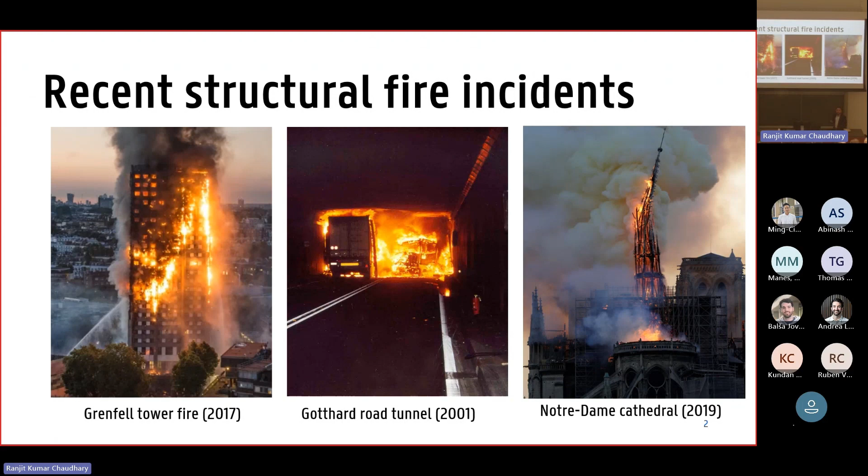Because these three structures represent different aspects of the consequences of fire damage to structures. The first one shows the damage to life and property. The second one shows the indirect damage caused - if the tunnel remained closed for 2 months, you can imagine how big an impact it would have on companies, offices, and several other works nearby, so the indirect cost was huge. The third one represents the damage to cultural heritage. The structure's history dates back almost 800 years, and it damaged something built very long ago, so you can realize the value of the structure.

So as explained about the three structures and their damage consequences, the consequences of fire on structures can be grouped into 5 consequences. Based on world fire data, roughly 1% of the GDP of most developed countries is spent on the cost of fire - the cost for fire protection and the cost for this type of damage due to structures. Realizing we have huge consequences of fire on structures, and a huge amount of funds going to fire protection, our structures should be designed adequately for fire, considering the economic point of view as well.

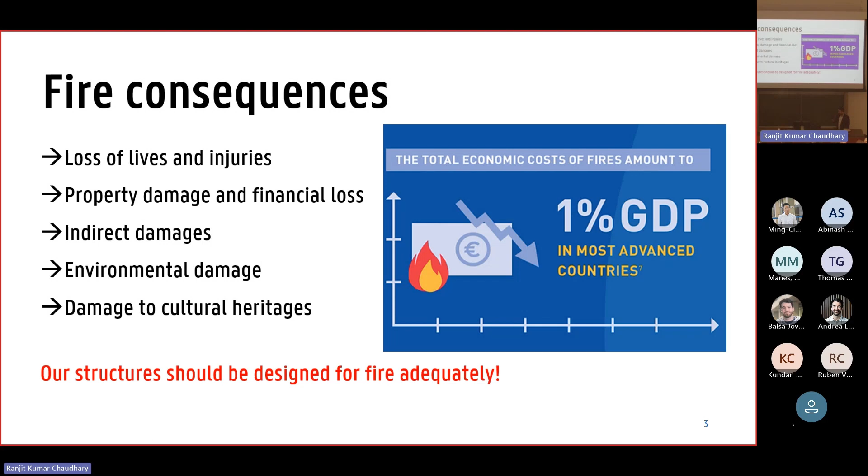So how do we design our structure for fire? Normally we consider a prescriptive approach. Prescriptive approach means we have design standards and design guidances such as Eurocodes, and these design guidances provide requirements for fire design. For example, let's take a reinforced concrete slab designed based on Eurocode 2. To design this slab, which has a thickness of hs and an axis distance of a, we get the values of these parameters from the Eurocode.

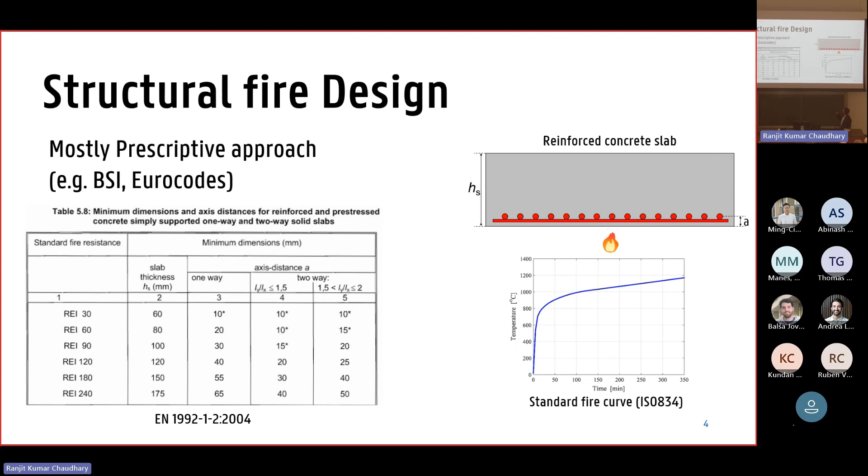We have standard fire resistances for different durations of fire exposure, and correspondingly for one-way slabs or two-way slabs, we have these axis distances. So we just go into the Eurocode, look at the data, and design our structure. This is the standard fire curve, shown here in the graph.

In these situations, we assume that our design is safe and adequate enough. Why so? Because these tabulated data are based on the historical performance of structures, based on failures in the past, based on experimental tests, and based on numerical investigations. So in this case, we assume our design is safe.

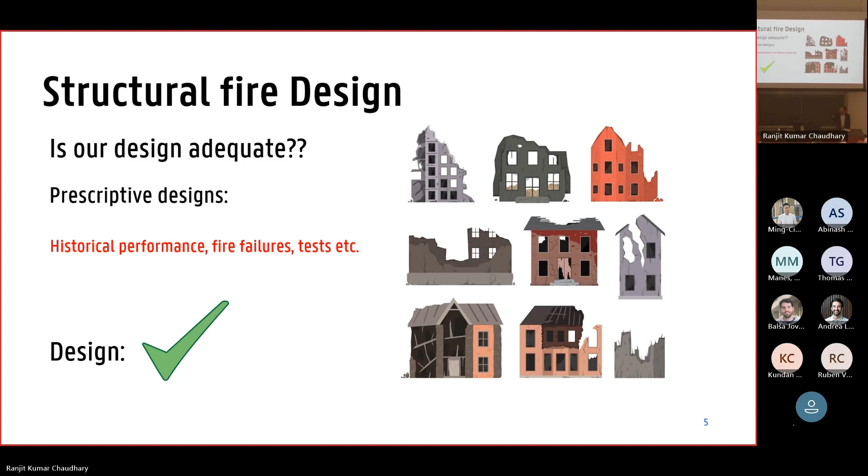But what about design for special design situations? By special design situations, I mean when we don't use the standard fire curve, which has only a heating phase - now if we have a natural fire curve, which has a heating phase and cooling phase as well, or we have special types of materials, for example wooden or timber, or we move to other advanced or high strength materials. For those situations, developing prescriptive designs or design requirements is very difficult because we need huge resources and huge time to develop these design requirements. So for this type of design situation, we adopt a performance-based approach.

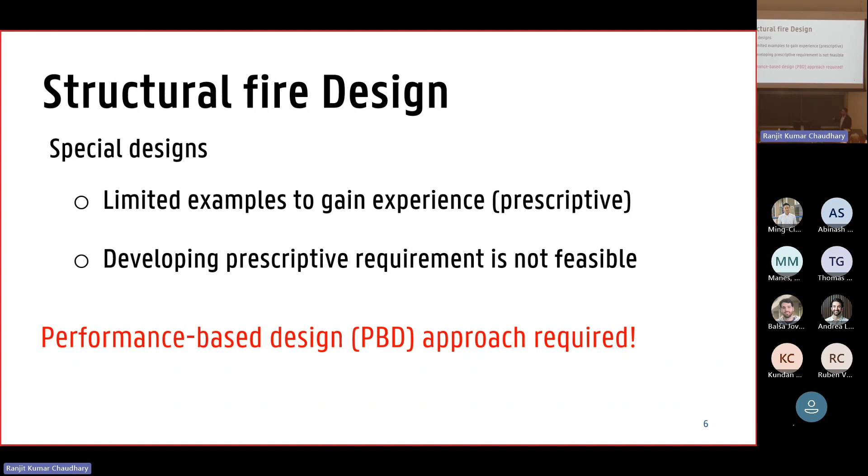And what is a performance-based approach then? In performance-based design, we are free to choose our design alternatives, our design materials, our design approach, and then we are also allowed to choose our own design objectives. But then the societal design objectives should always meet them.

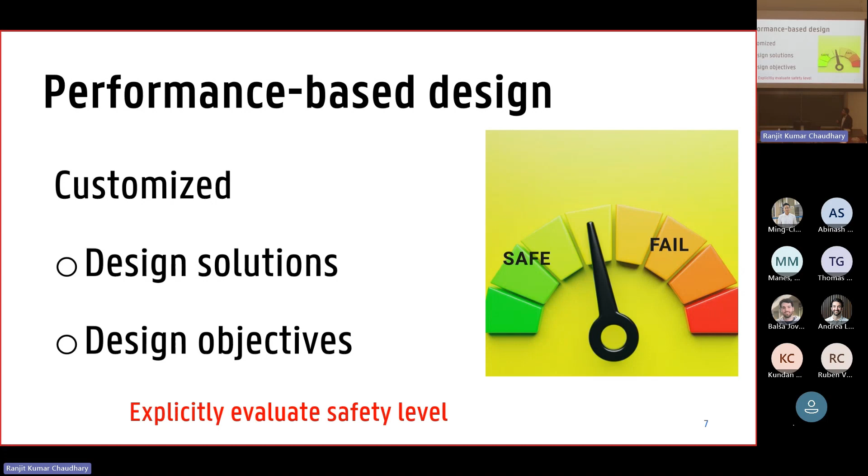Basically, we need to demonstrate in the performance-based design itself that our design is safe enough. How do we do that? We can do that by explicitly evaluating the safety level. So how do we demonstrate that our design is safe in the performance-based design approach? One of the approaches is through probabilistic risk assessment. We can plot the risk profile of the structure and check whether our design is safe or not.

So for a basic introduction to risk, for fire exposure of the structure, let's say there is a structure, and then there is a fire on the structure, and the likelihood of occurrence of fire is lambda. And due to the fire, there is a consequence of the structure, which is, for example, D. Then risk is defined as a function of the product of this likelihood of fire and the consequences of the fire. So now we know what risk is.

But what we can do is we can also plot this risk profile in a graph. For example, here the plot is shown for a general frequency-consequence diagram. So what we can do is plot the consequence severity on the horizontal axis, and plot the frequency of occurrence of these consequences, and we can plot the risk profile on this graph. If our design lies below this tolerability limit, our design is acceptable. And if it is above this tolerability limit, it is unacceptable.

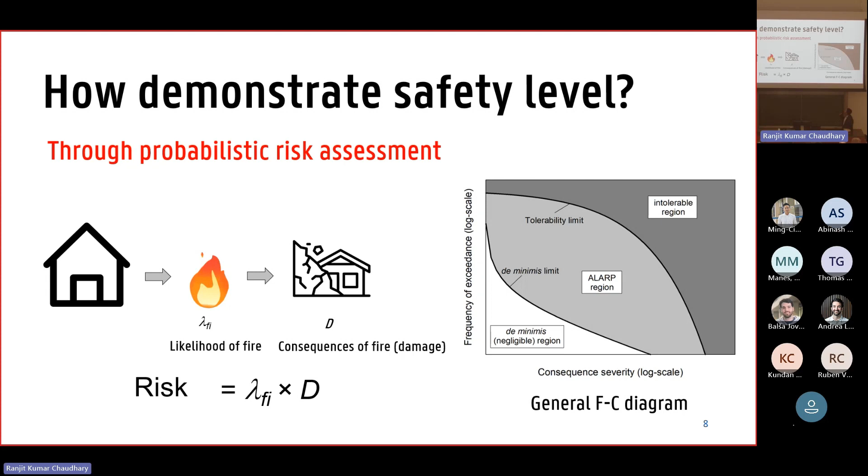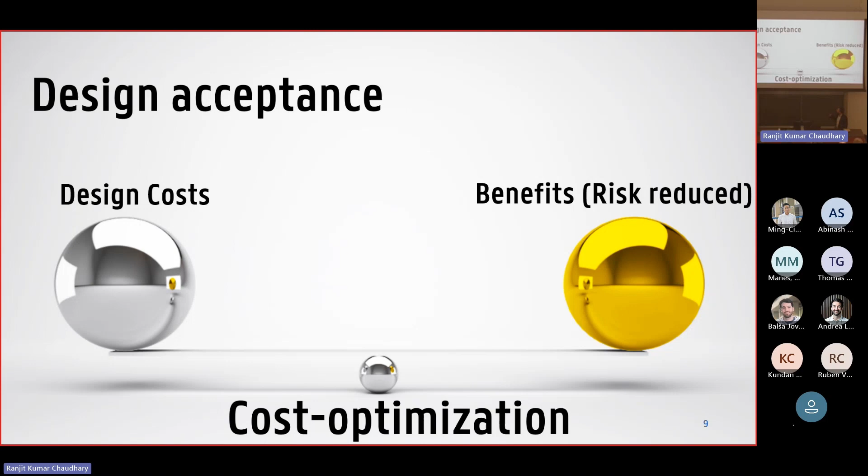So basically, we ensure our design is either in the ALARP region or de minimis region. But how do we ensure that our design is there, like in the ALARP region, or is sufficient enough? One of the approaches is through cost optimization. What we can do is we have the investment cost associated with our design alternative, and corresponding to that investment cost, we have risk reduction or risk associated with that structure. We can explicitly balance these two, and then our design is safe enough, we can say.

So now you understand the meaning of the topic of my dissertation, which is risk-based optimization of design in the case of structural fire design. I defined risk, I defined optimization of design, and then I defined what structural fire design is.

My dissertation can be divided into two parts. The first part is methodology and tools. In this part, I develop the methodology for risk-based design frameworks, and then the tools which support those risk-based design frameworks. In the second part, I implement those risk-based design frameworks using case studies.

So coming to the first part, I have 3 chapters. The first one is the risk-based design optimization framework, and chapters 3 and 4 support and basically provide the tools for the risk-based design optimizations. So coming to chapter 2, which is the framework for risk-based design optimization.

First of all, I would like to discuss the first framework, which is the lifetime cost optimization. So I would again discuss the same example for risk, where I defined the definition of risk.

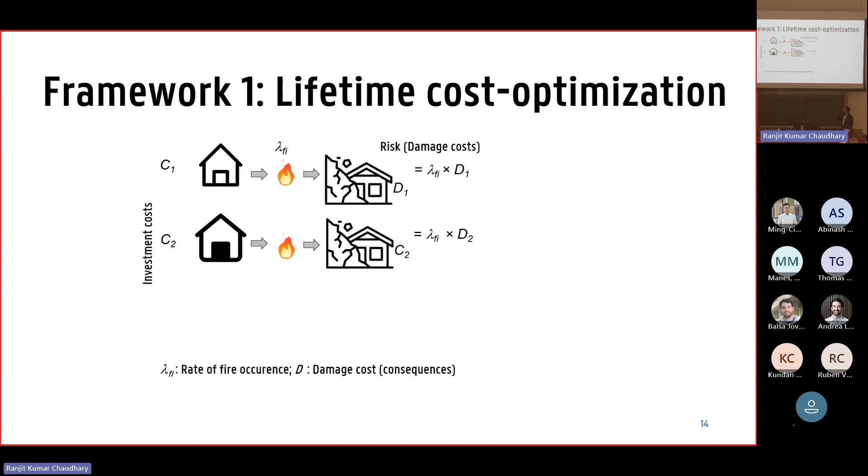First of all, let's say we have a structure, and for that there is a particular design solution or alternative, and the cost associated with it is C1. And the corresponding risk, or we can say damage cost associated with the structure, is this one. Then we have another design alternative, C2, and similarly we have another design cost and damage cost, and for the i-th cost we get the i-th consequence or the damage cost.

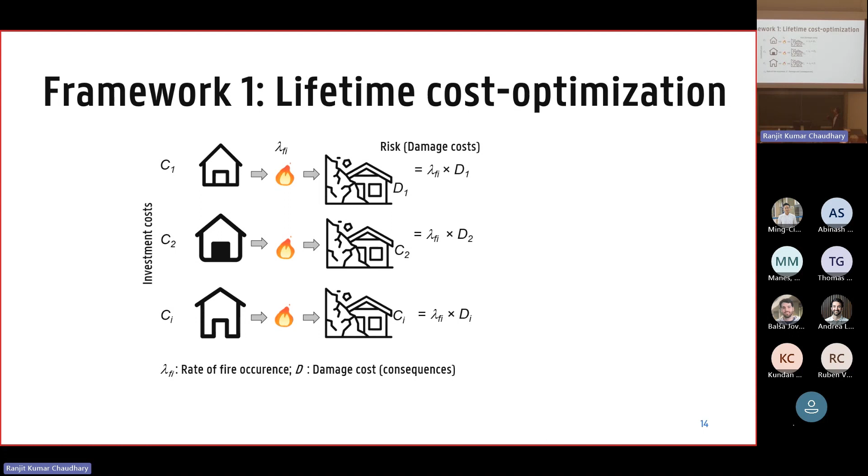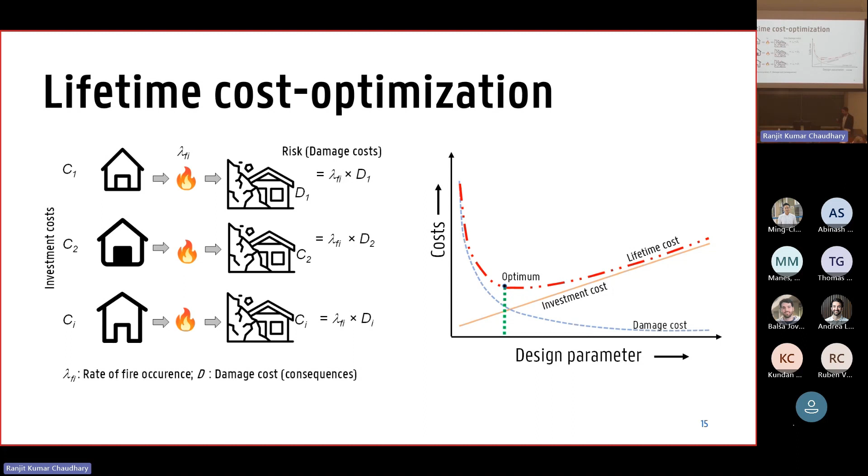And so if we plot the total cost, which is the lifetime cost, we have an optimum point, and that's how we do lifetime cost optimization here. To generalize more, because this was for the discrete case, we can formulate it as a

lifetime cost, which is the sum of the investment cost and the damage cost. This investment cost is the same as I said, but it also includes the obsolescence value, which is the cost of degradation for the investment year on year. And since it is a future value, I used a discounting factor to get the present value of those obsolescence costs. Similarly, the failure cost of the structure—since we are at the design stage, the failure cost associated is a future cost, and we convert it into present value also with the discounting factor. So this is how we do lifetime cost optimization.

I will discuss more of this using a case example in later chapters.

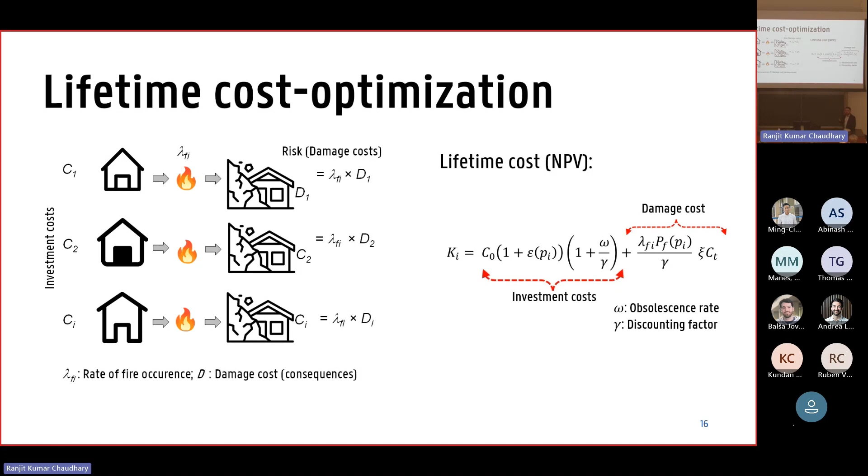And now we have this again. Let's focus on this equation for the lifetime cost. We have the first objective, let's say investment cost, which needs to be minimized for a design, and then we have this failure cost, which also needs to be minimized. So we have two design objectives here, and we added these two design objectives. But what if we have multiple design objectives and we cannot add up those design objectives?

For example, for the environmental cost, it is normally measured in CO2 emissions, and it does not immediately have an economical or monetary value. So we cannot add it up, and the optimization becomes difficult.

So for those situations, what we can do is apply a multi-objective optimization approach.

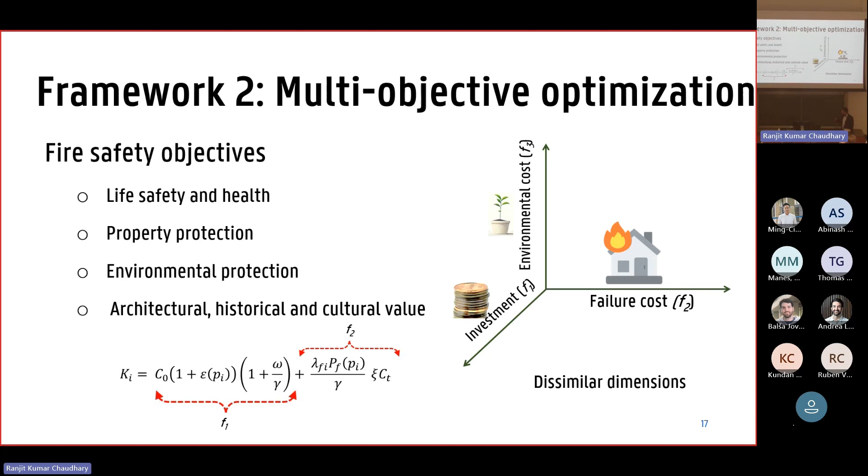And here is a general framework for multi-objective optimization. Based on this framework, what we first do is formulate a multi-objective optimization problem. We define design objectives, we define design constraints, and we define design variables. All of these can be multiple.

And then using an optimizer, for example here it is a genetic algorithm, we get multiple trade-off solutions. These multiple trade-off solutions are also called Pareto optimal solutions, and they present an optimal surface for the entire design objective. Once we have these multiple trade-off solutions, which are the optimal solutions for the entire design space, based on higher level information we can get one best solution.

So what I mean by higher level information is, for example, if we have environmental cost and CO2 emission which we evaluate, we can assign CO2 emission a monetary value, which can be a variable. Then for any combination of that CO2 emission conversion factor, we can immediately evaluate the best solution. So this approach becomes very efficient in that way.

And also we are free to choose any number of objectives, because in lifetime cost optimization, if we add different objectives we have to perform a grid analysis, and it quickly becomes challenging and difficult. So that's how multi-objective optimization is quite significant.

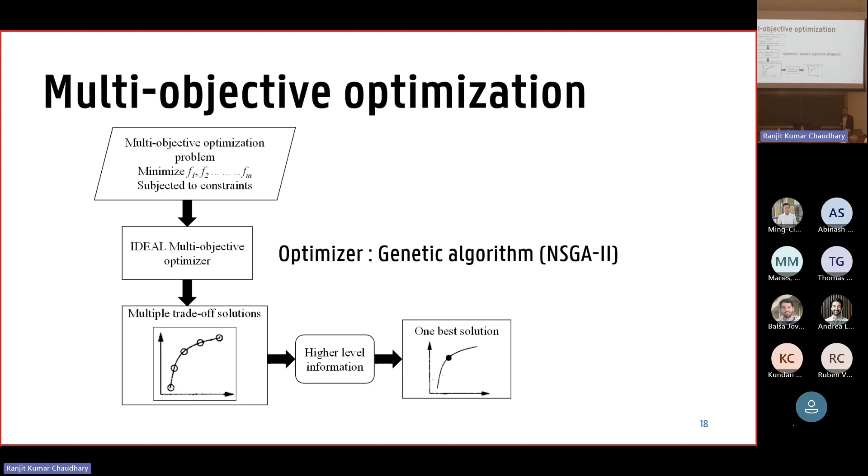And the third framework here—it's not basically a framework, but I presented it here as a framework just to keep it a bit separate. It's the generalization of the results of cost optimization.

The lifetime cost optimization and multi-objective optimization involve a lot of tasks, like evaluating the investment cost, evaluating the failure probabilities, evaluating the consequences. So it's quite a laborious task, and carrying out this optimization for all of the projects we have becomes very challenging.

So what we can do is propose a common target, and based on that target we can design our structure. That's how we can avoid the entire cost optimization approach by just looking at that target. This is already followed for normal design conditions, not for fire—for example, in JCSS and ISO standards, where they propose these target reliabilities for the design.

So what target reliabilities means: from our cost optimization, we get an optimum value of the design parameter, and for that optimum value of the design parameter, we can evaluate a corresponding probability of failure, which we can call the optimum failure probability.

And then there is a corresponding target reliability, optimum reliability, which we can select as target reliability. So for common design situations, like if we need to establish a common design standard, we can adopt this approach and propose these target reliabilities for that.

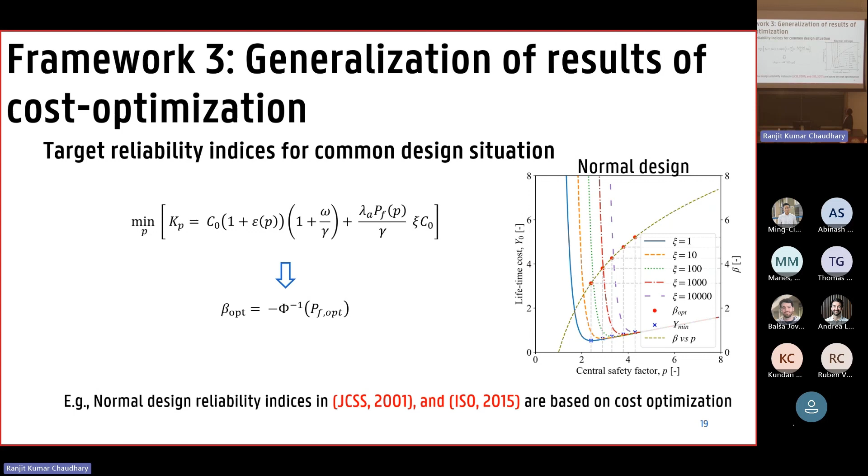In order to validate the approach, I carried out this lifetime cost optimization. For normal design condition, I plotted the different lifetime costs here in function of the central safety factor for normal design condition, and then I got the optimum value of the design parameters, and corresponding to this, I got the target reliabilities.

This is just to check if our approach is in line with the current state of art. We compared the obtained target reliabilities with the standard, that is JCSS, and we can see that the target reliabilities match well with what is in the existing standard.

But for fire design, we don't have these target reliabilities defined yet. So basically, our design standards do not provide anything such as target reliabilities for fire. So one of the tasks for my PhD is also evaluating these target reliabilities for fire design based on this cost optimization approach.

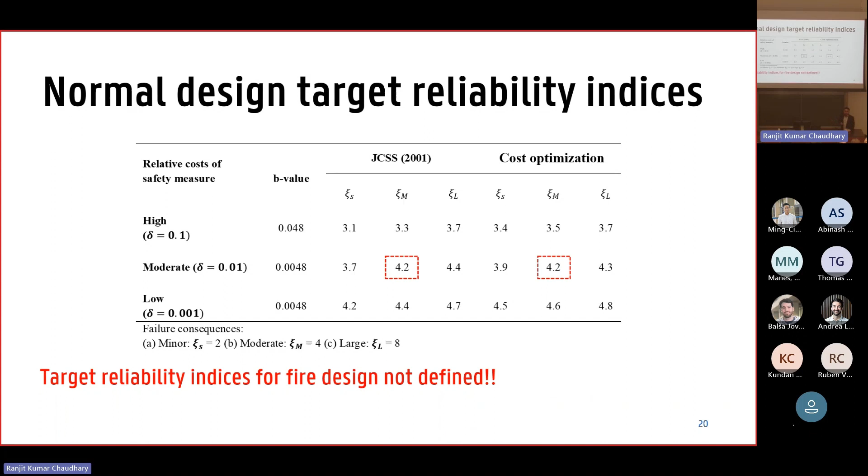Now I'm going to discuss the tools which have been used in my dissertation to support this cost optimization. The first tool is surrogate model-based structural fire design optimization.

So let's see again the lifetime cost optimization equation. We have this lifetime cost. For the evaluation of damage cost, which is risk-based, we have to evaluate the failure probability. And this is also a function of the design parameter and also the fire scenarios. So evaluating this failure probability is quite computationally expensive.

If you see this flow chart here, for the failure probability evaluation, we need to run our structural fire analysis 10 to the power 4 times. And structural fire analysis is itself a computationally expensive task, because you need to first carry out thermal analysis, and then you need to carry out the structural analysis. So it is a two-step process, and if you adopt a finite element approach, then it quickly gets too expensive.

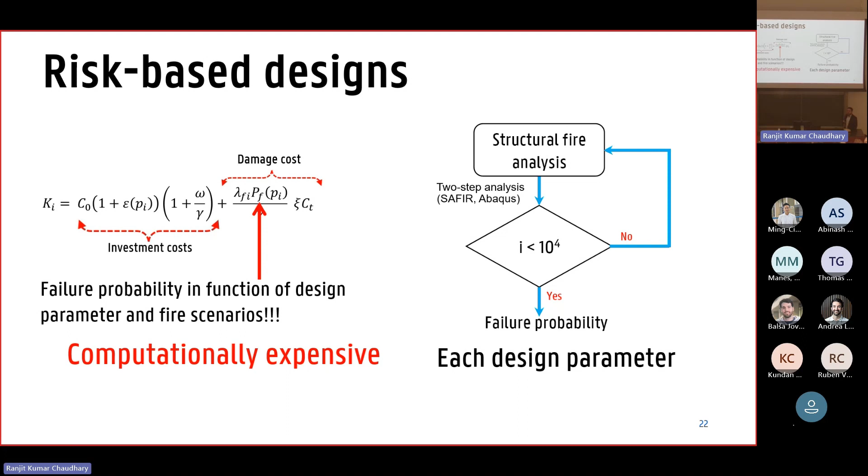So for that, I propose a surrogate modeling approach, and then our task for evaluating this failure probability or probabilistic analysis becomes easier and computationally efficient. What do we do in this approach? We replace these SFE models with ML models, which are also called surrogate models. We train these SFE models with machine learning models, and then we directly use it for our failure probability evaluation.

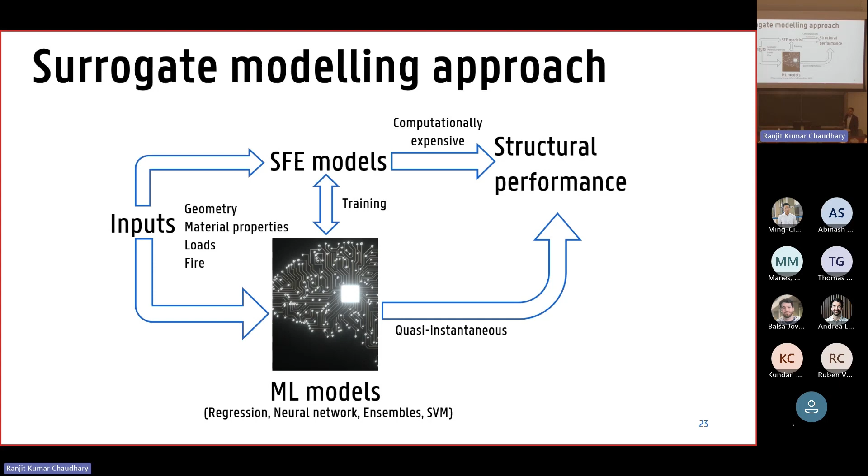As a case study, I consider two application examples here. The first application example is a case where the bending moment capacity of a slab is evaluated, and this bending moment capacity of the slab is evaluated based on this equation, which also gives bending moment capacity for fire situation. But for fire situation, we need to evaluate the temperature of the rebars in the slab.

Although it is an analytical equation which requires no computational expense, evaluation of temperature requires some computational expense. So it is a little computationally expensive as well.

So in order to make a surrogate model for it, I considered a regression-based surrogate model. For example, it's a 2-degree polynomial here, but other degree polynomials have also been checked, and the best one has been fitted. It's not shown here exactly because it's a big model.

So the probabilistic analysis is carried out for this slab, and you can see the probabilistic distribution for the bending moment capacity of the slab in this graph, where we can compare the probabilistic distribution from the actual model and the surrogate model.

And the surrogate model, one of them is based on just 100 samples. That is, the surrogate model here is trained only on 100 sample data. For the other case, the surrogate model is trained on 2000 sample data. For the 2000 case, it performs quite well, and the surrogate model with 100 is also quite close. This shows that the surrogate model approach can be used for the probabilistic analysis, and it results in quite a bit of accuracy, while reducing computational expense significantly.

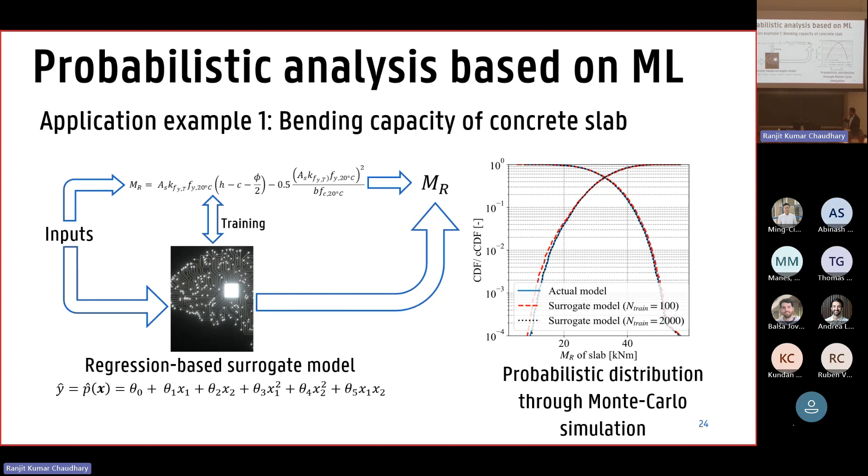As a second application example, a bit more complex and computationally expensive structure is taken. The case of an RC column is taken, for which the axial load carrying capacity is evaluated, done in a finite element program, SAFIR. For 10,000 evaluations for the probabilistic evaluation, we need around 7 days of calculation on a standard PC using one core.

When we use the surrogate model, it becomes quickly cheaper, and we can also evaluate it for a large number of combinations of the design parameters. Here also you can see the comparison of the probabilistic distribution, the cumulative density function, between the actual and surrogate model, and it matches quite well, especially at the lower quantiles.

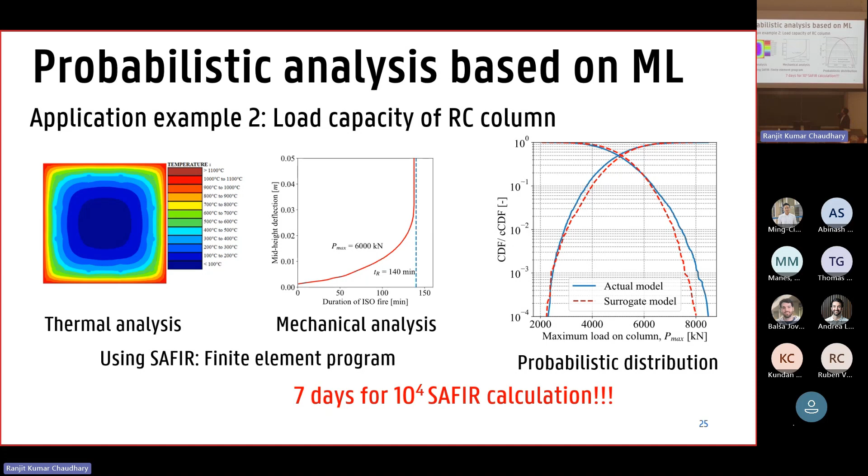So now the next thing which we required for our lifetime cost optimization is fire damage cost. And for that, in this chapter, I propose the damage cost evaluation framework.

Our optimization becomes easier, and we can do a lot of parametric analysis. This failure cost, that is the total damage cost in the structure, includes the direct cost and also the indirect cost. The direct cost includes the property damage cost, and also the human fatalities and so on. Indirect cost is basically used here as a percentage, but in real life problems we can include business interruption cost, financial loss cost, and others in these factors as well. For now, it is just considered as a factor, this indirect cost, in this study.

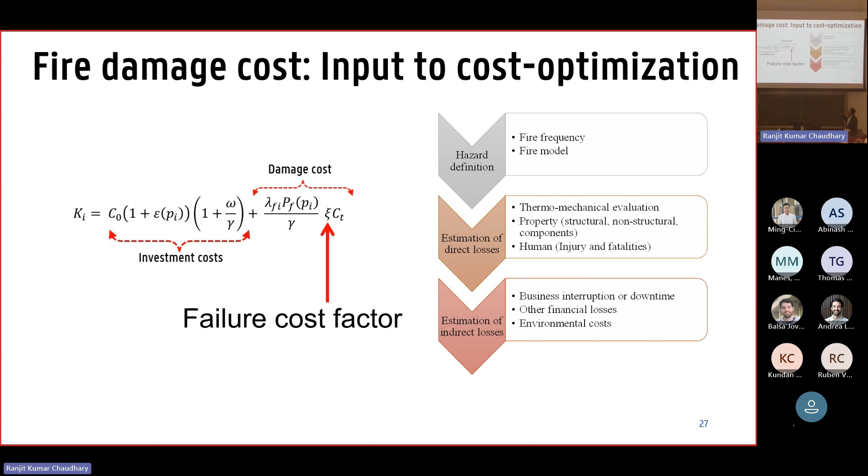The second one is a risk-based evaluation of the fire cost. In this, we list out all the consequences associated with the structure, and also we calculate the likelihoods of those consequences, and then we get the final total cost — it's risk-based. I will discuss more in detail.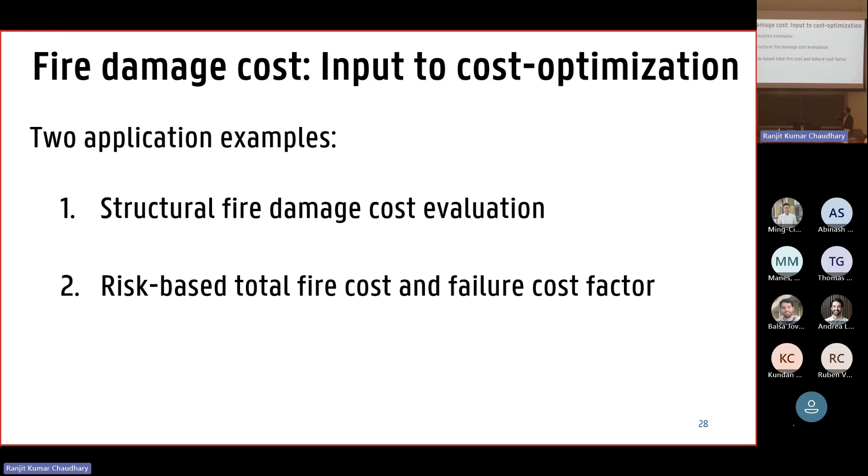So for the first application example, I considered a case of a composite slab panel. This is a structural model of a composite slab panel. We have a concrete slab, which is resting on this steel beam, and we have the reinforcement in the concrete slab.

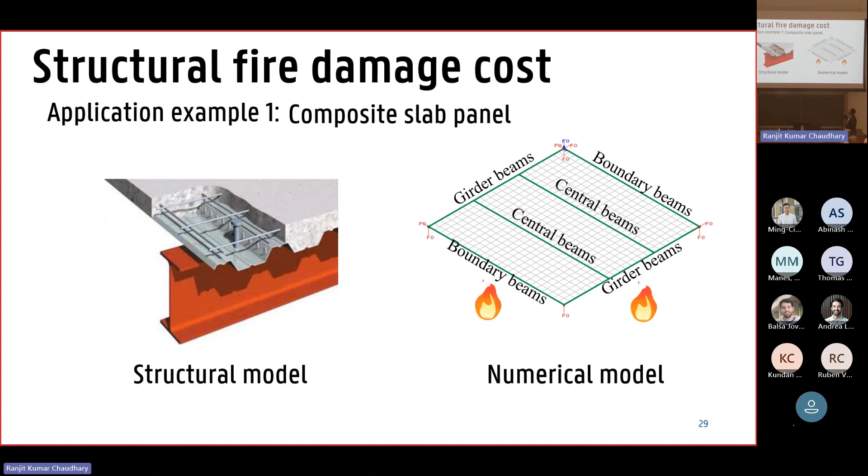The figure on the right shows the numerical model for this structural model, which is simulated now with the boundary beams — there are two girder beams, two boundary beams, and two central beams — and all of this structure is exposed to fire.

Two design situations are considered to evaluate the damage cost associated with the structure. The first case is the prescriptive design, and the second case is the performance-based design. In prescriptive design, we protect all the boundary beams and also the central beams. But for the performance-based design, we protect only the boundary beams, and the central beams are not protected.

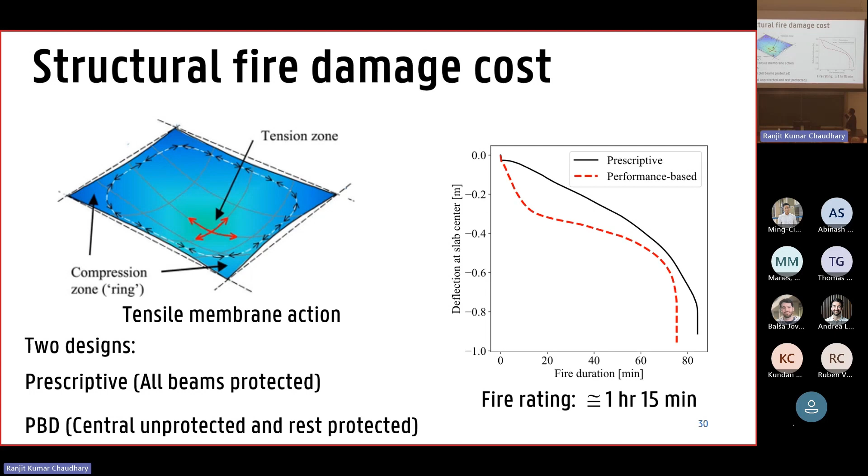Protection here refers to spray-applied fire-resistive material protection on the steel beams. For the performance-based design, we do not apply that type of protection, and we only apply it at the boundaries. However, when we check for the standard fire rating, which has only the heating curve, both of these designs, even when unprotected, show almost the same fire rating — both show a fire rating of around 1 hour and 15 minutes.

For the simulation of the fire, we don't consider here the standard fire curve. Normally in design standards, we consider the standard fire curve, which is the heating phase — the time-temperature curve that always increases in this fashion. For my dissertation, I mostly consider the natural fire curve, which is the Eurocode parametric fire curve, and this has the heating phase and the cooling phase as well.

This parametric fire curve is considered as a function of fire load density — how much fuel load we have — and the opening factor, which is our opening or ventilation condition in the compartment. So this is how the parametric fire curve is defined in the rest of my dissertation.

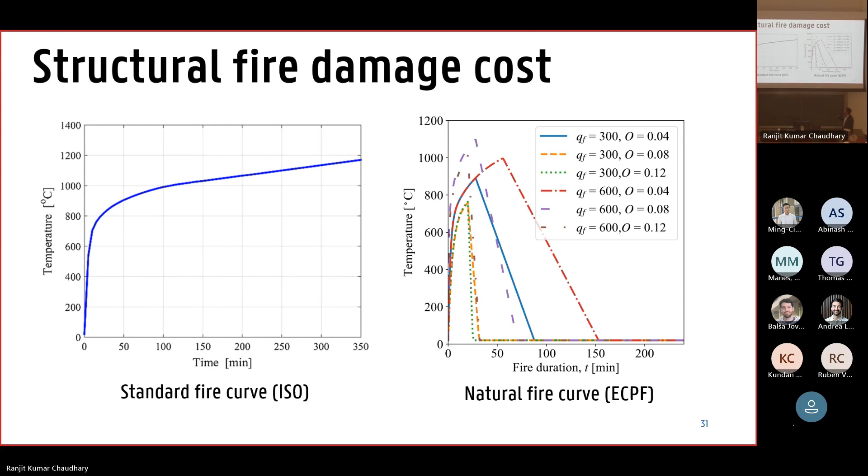And how do we estimate the damage to the structure once it's exposed to fire? When the composite slab panel is exposed to fire, we evaluate damage as the damage depth in concrete. So if there's fire in the concrete slab, we evaluate the depth inside the slab up to which the temperature of 300 degrees centigrade is reached, and those parts need to be removed and replaced with fresh concrete. That's how that damage is evaluated.

Another parameter to evaluate the damage is the deformation - what is the deflection in the concrete slab? For the steel beams, damage is measured through the damaged SFRM layer. We evaluate the temperature because at 300 degrees Celsius, the SFRM damages quite heavily, so if it reaches more than that, we consider our SFRM damaged. Another parameter for the steel beam, the mechanical parameter, is the heat straightening parameter - we check whether our steel beams can be repaired by heat straightening or not.

So once we have these damage measures for the composite slab panel, we can associate a damage state. Basically, we define whether it can be repaired or not. If it is repairable, we estimate the repair cost. And if it is not repairable, we take the value to replace the structure entirely.

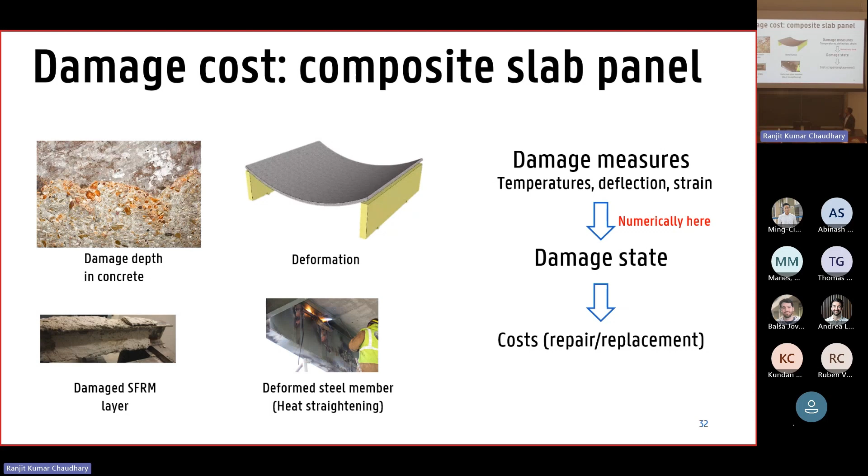This slide shows the repair costs or damage costs evaluated for our two design situations, the prescriptive design and performance-based design. We saw before that these two design cases have almost the same fire rating, but here we can see that the repair costs are different. For the prescriptive design, we have lower repair costs for lower fire severity. However, for the performance-based design, most cases are irreparable because there are huge deformations in the composite slab, due to which most slab panels are irreparable.

So basically what we achieved here is cost saving on insulation, but this is not very efficient when we see it from a repair cost point of view. So although we try to save cost on insulation, from a repair point of view the cost saving is not efficient because we have huge costs in the performance-based design.

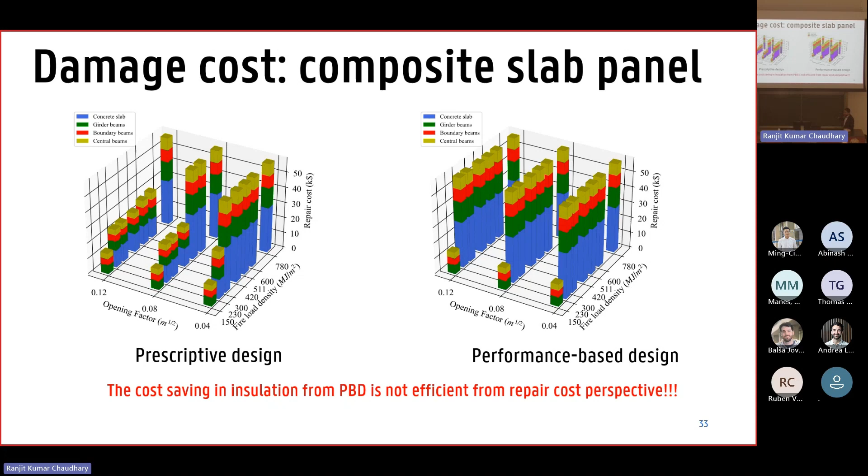The next application example is the steel column in a multi-story building. The steel column is exposed to fire here, and it's a 9-story office building. In this case, we evaluate the damage cost based on the risk assessment, and for that these are the 4 consequences considered: repairable and irreparable condition, and failure of the compartment or failure of the entire structure.

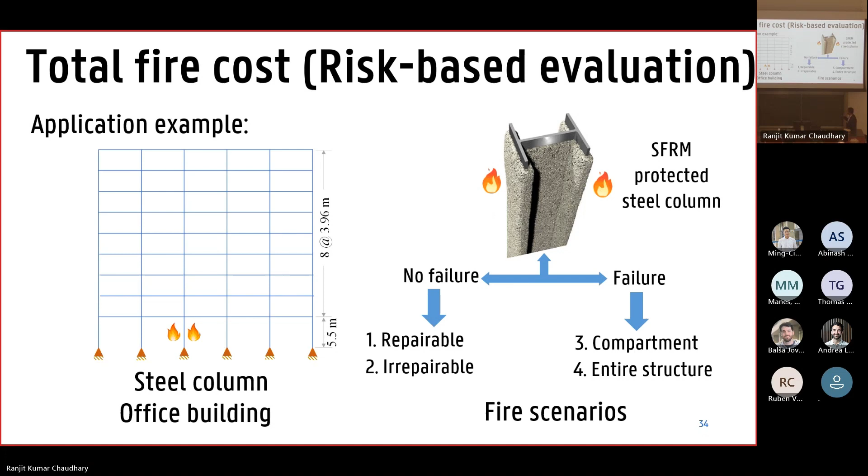So basically, if the steel column is exposed to fire, either it does not fail or it fails. If it does not fail, it's either repairable or irreparable, and if it fails, there's either just failure of the compartment or failure of the entire structure. Based on these consequences, we evaluate our damage costs. For the evaluation of the likelihood of the repairable case, the failure case, and the failure of the compartment itself or the entire structure, we consider these factors.

For the failure probability, we consider the exceedance of the buckling capacity. So if the buckling capacity is exceeded, we evaluate the failure probability of the structure, and if it fails, we have the cost of the compartment associated with it, and so on.

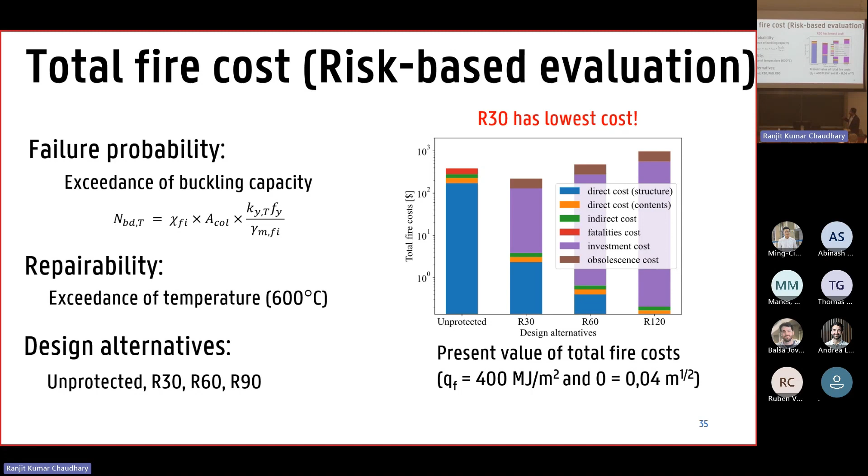Based on those total fire costs, we also evaluate the failure cost factor. This failure cost factor is evaluated as a function of the robustness of the building - that is, if the compartment fails, whether the entire structure fails or not. We consider this based on the probability of robustness of the building, plotted on the x-axis. We also compare the total failure cost of the structure with this failure cost factor, which is defined in function of the total cost factor and the robustness factor. This total cost factor comprises the direct cost, indirect cost, and fatalities.

So for our reference column, the failure cost factor is obtained as 207 times the cost of the compartment - basically 0.61 times the cost of our nine-story building. So if there is fire in our reference building, the fire damage cost is 0.61 times. For our optimization, I'm going to consider this value for the next application example.

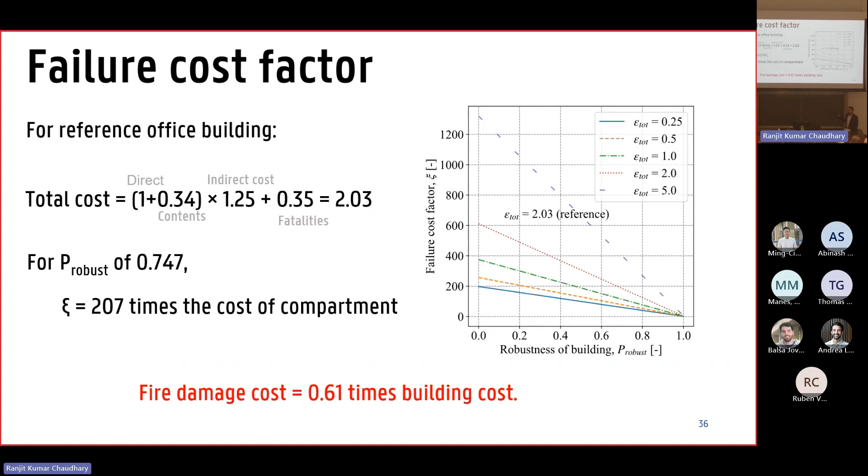So now coming to implementation, the implementation is carried out in 3 chapters. The first chapter is lifetime cost optimization. The second one is multi-objective optimization, and the third one is system level effects consideration. Basically the same application case of the composite slab panel which we discussed before.

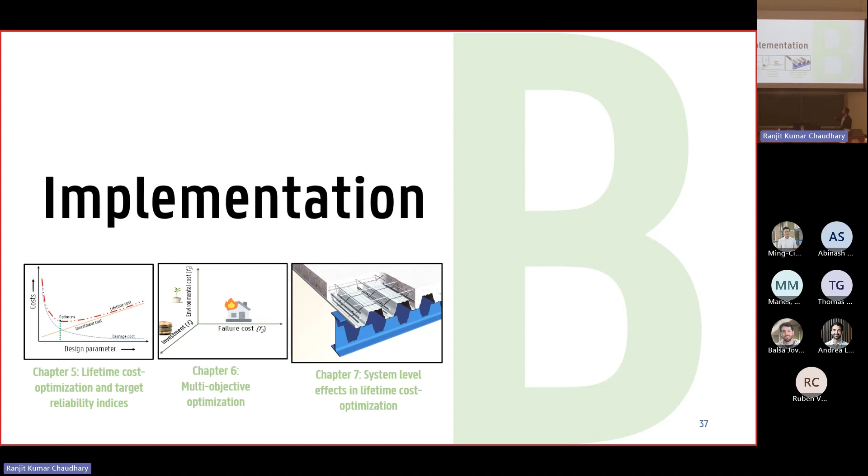Let's first see lifetime cost optimization and the evaluation of target reliabilities. As an application example, the same case of the steel column is considered because we already evaluated the failure cost factor there. The failure and the probability of failure is again evaluated based on the exceedance of the buckling capacity, and you can see the failure probability evaluated for the steel column.

Here, the optimization parameter for the steel column is the thickness of this protection material. The probability of failure is evaluated as a function of this insulation thickness and also as a function of the fire exposure parameters - the fuel load, as I said before, and the ventilation conditions. Once we have our failure probability evaluated, we can plug these into the lifetime cost equation.

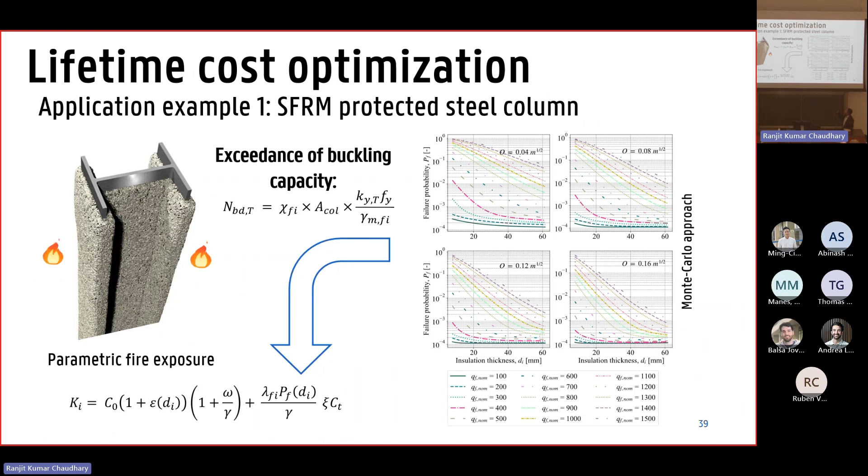We also have the failure cost factor here, and the investment cost here is the cost of the increased value of the thicknesses of the insulation. That's how we get the lifetime cost, and we can obtain the optimum value of the lifetime cost based on this. Here the red curve shows the plot of these lifetime costs.

For the reference steel column, which is the fire exposure for office building standard, is 420 megajoule per meter square, and for that case we have an optimum insulation thickness value of 17 mm if we consider our ventilation factor of 0.04.

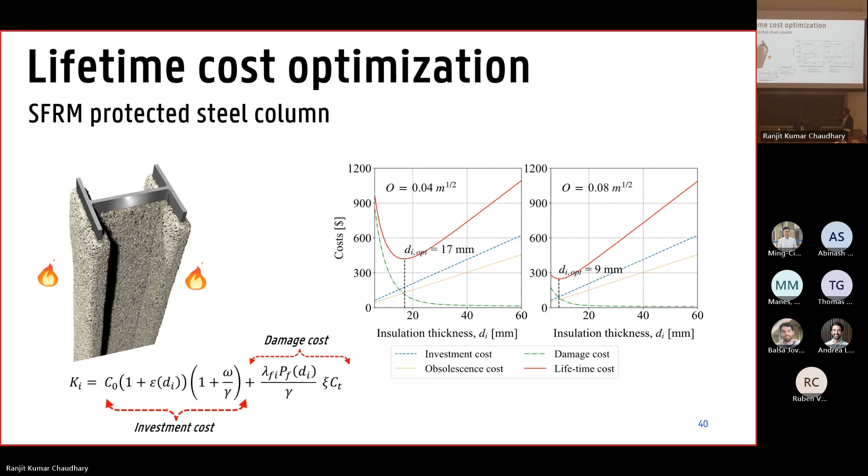This figure shows the insulation thickness evaluated as a function of the fire load density for different fire load densities and for different ventilation factors. Corresponding to this, I also plot here the different fire ratings for those different insulation thicknesses.

For our office building, which has the fire load density of 420, we can see that R60 is sufficient for all the ventilation conditions. So R60, which is 1 hour of fire rating, is sufficient for this type of building.

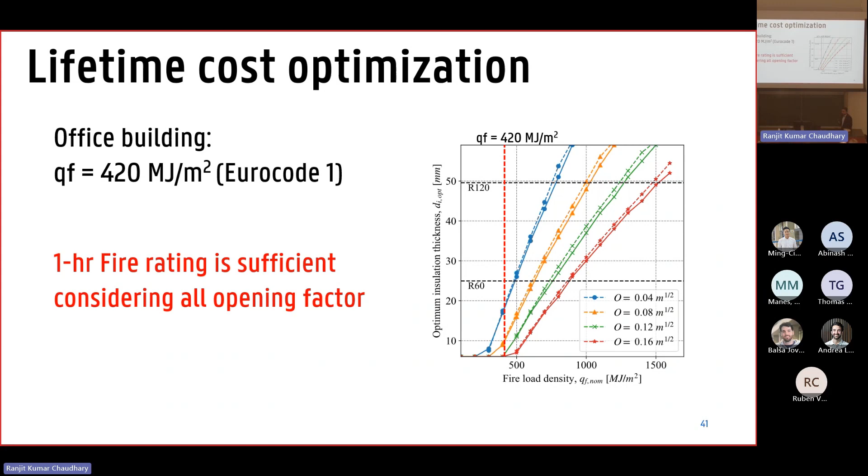Now I show once we have this optimum value of the insulation thickness evaluated, we have the corresponding target reliabilities. Here I plot these target reliabilities as a function of the fire load density and also the opening factor and another parameter, which is the failure consequences.

Now I'm changing the failure cost factor as a variable, and then you can see the results for different failure consequences. Once we have these target reliabilities evaluated, we can easily design our structure by considering these target reliabilities, and these target reliabilities can indeed be part of design standards. After that, we can generalize this target reliability in design standards.

For our reference case, when we considered without the sprinkler system and fire rescue service, the target reliability obtained was 2.9. But when we considered the sprinkler system and the fire rescue service, the probability of fire decreases, and so the target reliability also decreases - it decreases to 1.1 when we consider the active fire protection system in our building.

The same is done for another application example, the case of the reinforced concrete slab. Here, for the reinforced concrete slab, I optimize this reinforcement axis. This figure shows the optimum reinforcement axis as a function of fire load density and the opening factor, like before.

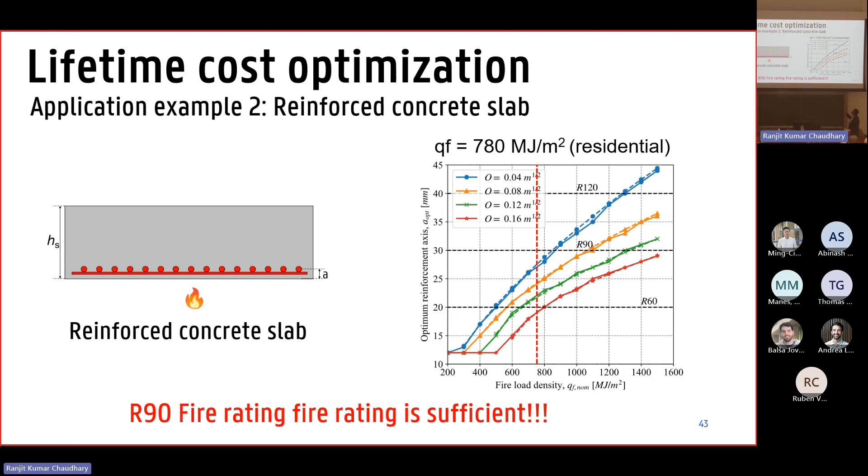Similarly, we evaluate the target reliabilities, and we also got this target reliability for the reference case as 3.0 and 1.1, quite close to the value before. So if we evaluate these target reliabilities for this type of standard design situation, which is going to be most often repeated in the future, then we can propose these target reliabilities, and then we don't need to carry out the cost optimization entirely.

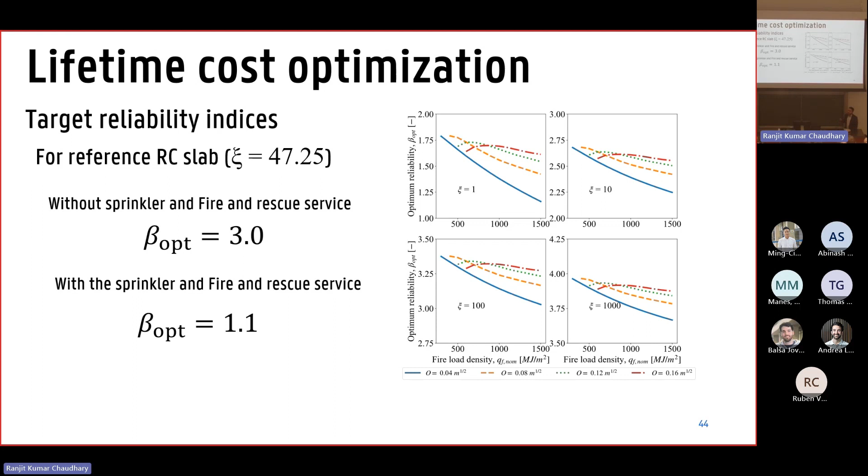We are moving to the next chapter, which is multi-objective optimization. In this case, we introduce additional design objectives, for example minimization of the investment cost, and we also introduce additional design variables. The same application example of the reinforced concrete slab is considered.

In the previous lifetime cost optimization implementation, I only considered the reinforcement axis as a variable, but here I'm going to consider the reinforcement area also as a variable. The bending moment capacity of slab varies quite significantly considering these two variables. For other variables, the bending moment capacity did not vary significantly, so those were not considered. Only these two design variables were considered.

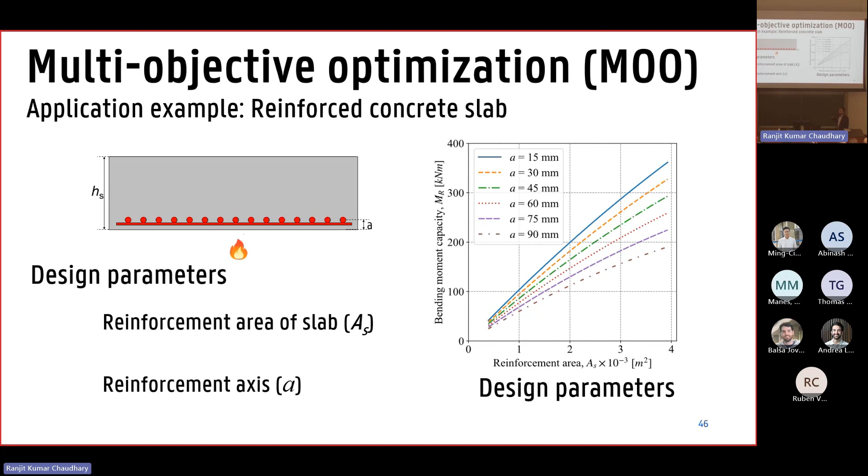An additional objective was considered, which is the lifetime environmental cost. We had lifetime cost in our lifetime cost optimization approach, but then we also consider environmental cost. But if you look closely at these design objectives, we have these two parameters: the increased reinforcement area and the probability of failure, only as a function of the design parameter and the fire exposure.

So why do we need to consider the entire terms here? We don't need to. What we can do is simplify our implementation by considering the increased reinforcement area and failure probability separately as an intermediate design objective. And we developed this Pareto optimal front, which I showed in the general framework for multi-objective optimization, where these are

actually those Pareto optimal fronts for our design application case. Once we have this Pareto optimal front for our intermediate design objectives, we can plug them back into these equations, and we can get the Pareto optimal front for the real objectives. So this is how it is performed here.

I consider two cases. The first case is where lifetime cost and environmental cost are both considered as design objectives, and the normal design conditions, that is the target reliabilities for normal design, are considered as design constraints. How these two are combined, or minimized, is the lifetime cost added to the environmental cost by considering a conversion factor for CO2 emission to dollars.

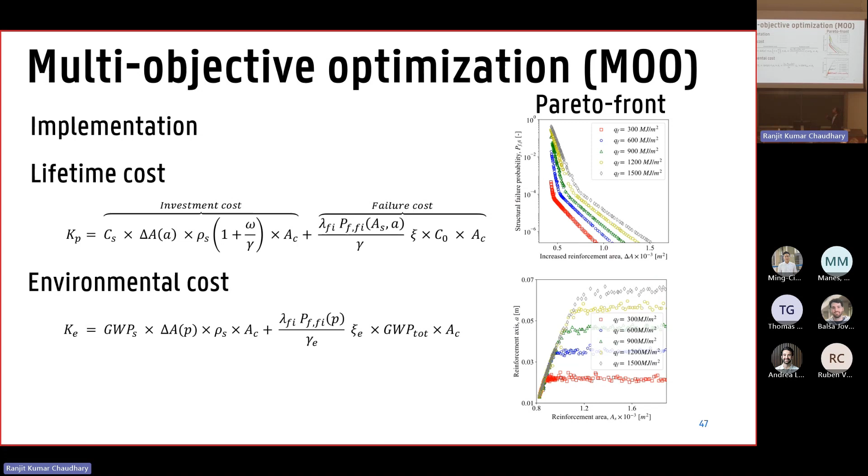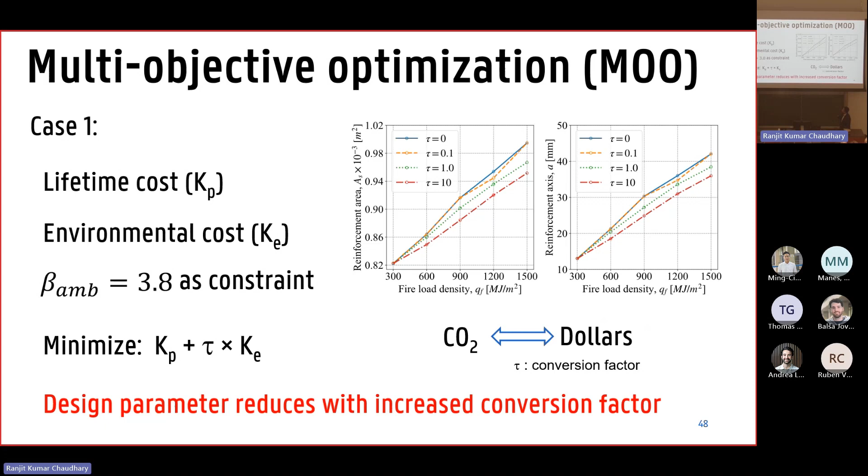When we considered the increased value of this conversion factor, we see that the requirement for the design parameters reduces. This is because the contribution to the environmental cost from the reinforcement is significant, while the contribution from the failure of the structure is not so significant, and that's why there is a decrease in the reinforcement area here. So we can conclude that the design parameter reduces with the increased monetary conversion factor value.

In the second case, the lifetime cost is considered as design objective, and the post-fire repairability is considered as a design constraint. For this case, we can see that post-fire repairability governs our design decisions for a failure cost factor of 100, but when we use a very high failure cost factor, for example 1,000, then our cost optimization comes into action.

But for the lower criteria, our post-fire repairability governs the design, because the post-fire repairability makes our design parameters so high that our failure cost becomes so low, and that's why the optimization does not play any role until this failure cost factor of 100.

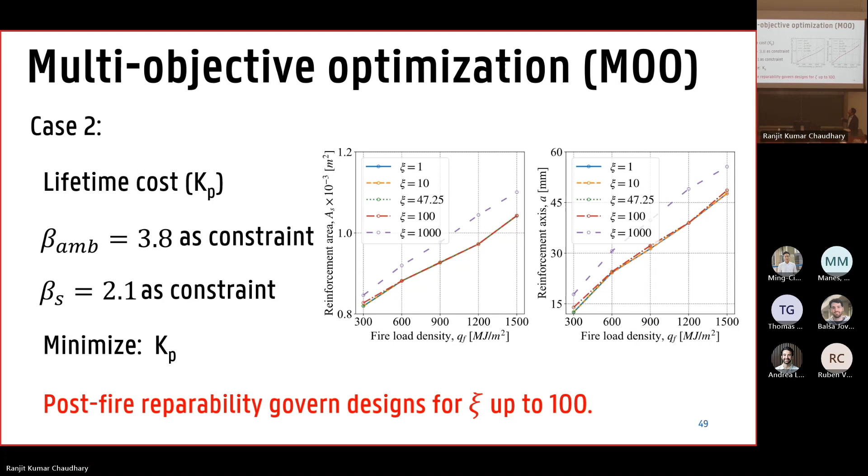With this, I conclude the multi-objective optimization. We discussed two cases for multi-objective optimization: the first with environmental cost consideration, and the second with post-fire repairability consideration.

In this chapter, I investigate system level design optimization. As a case study, I consider the same case of the composite slab panel. We have here the four steel beams and the concrete slab interacting with each other, making it a system level action.

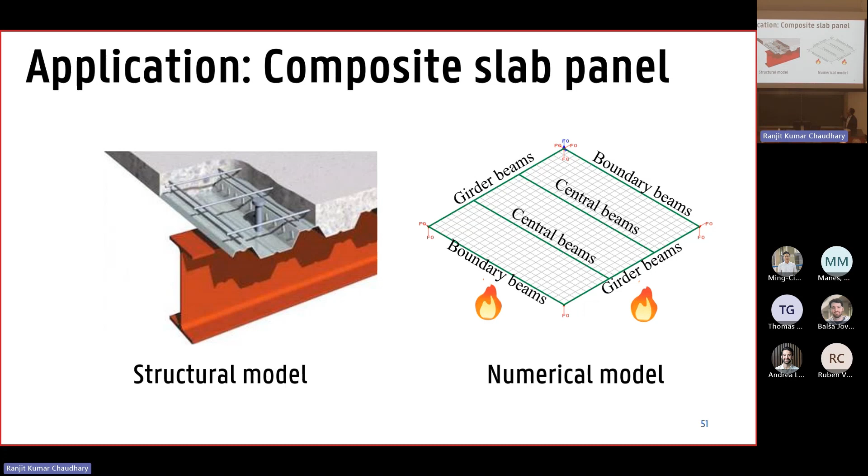So we consider the same application example here to demonstrate that. But here we didn't consider the two design scenarios as we considered in the last chapter. We considered here four design situations.

The first one is the central beams. They were unprotected, if you remember, in the performance-based design, and the boundary beams were all protected in case of the prescriptive design, and the central beams were also protected in prescriptive design. But here what we do is we vary this insulation thickness for these central beams, and we actually try to optimize the insulation thickness for central beams. And that's how we do lifetime cost optimization for these 4 cases.

And we see that for all of these 4 cases, we have almost the same value of the standard fire resistance rating, which is 2 hours of fire rating.

However, these design situations have different failure modes. The first 3 modes go into tensile membrane action sooner or later. What happens in this case is these steel beams, which are unprotected, with the occurrence of fire, the system loses these steel beams, and so our slab panel then goes into tensile membrane action, where the reinforcement in the slab takes up the maximum tensile force, and the concrete at the periphery takes up the compressive force. And so the failure here occurs by the failure of the boundary beams.

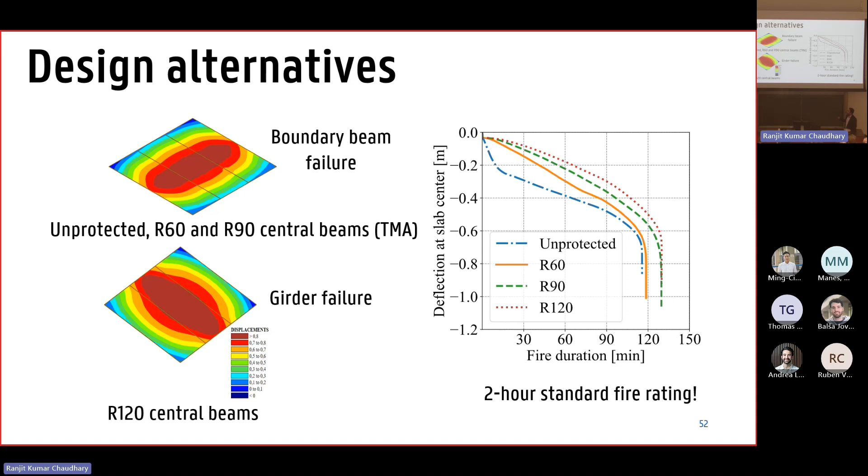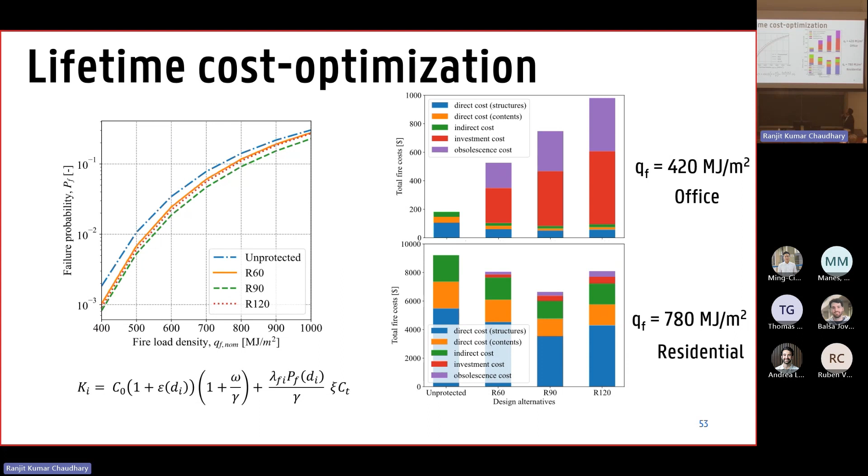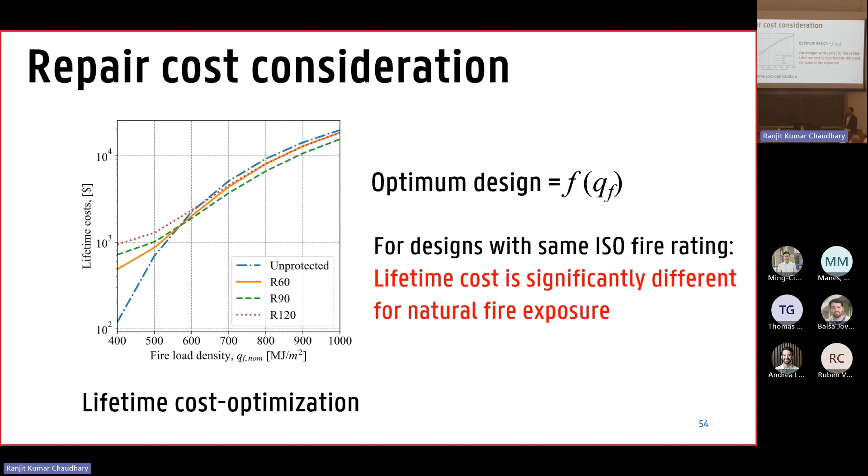So let's come to the conclusion now.

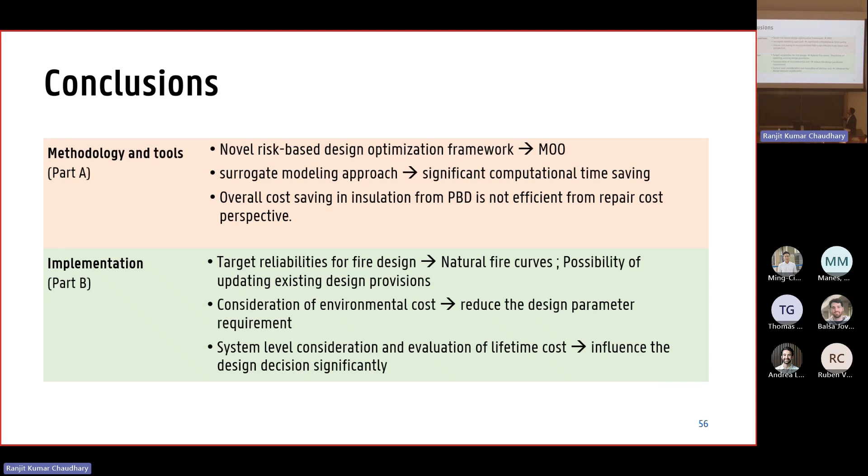And finally, we saw how system-level and lifetime cost optimization influences our design decisions in case of the case study of the composite slab panel. With this, I conclude my presentation, and thank you all for the attention.